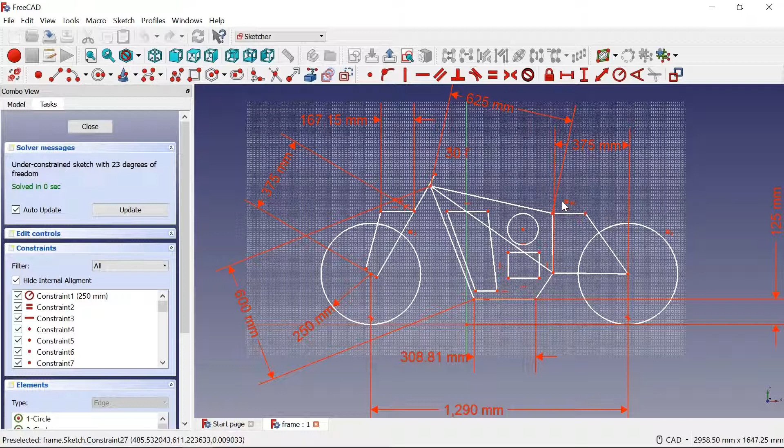I did think now that perhaps I'll make it a hardtail and put a seat on it, a sprung seat, and then I started thinking about springs. Oh dear, then I got distracted again making springs. What a job.

Here we go, spring making. We go into this thing, which is a funny thing. This generates a helix, which is fine.

We'll go for the height first, 60 millimeters, and we'll go for a radius of half that, maybe just under. And then pitch, we want it to go into 60, so we'll have 5 turns, so that's 12.

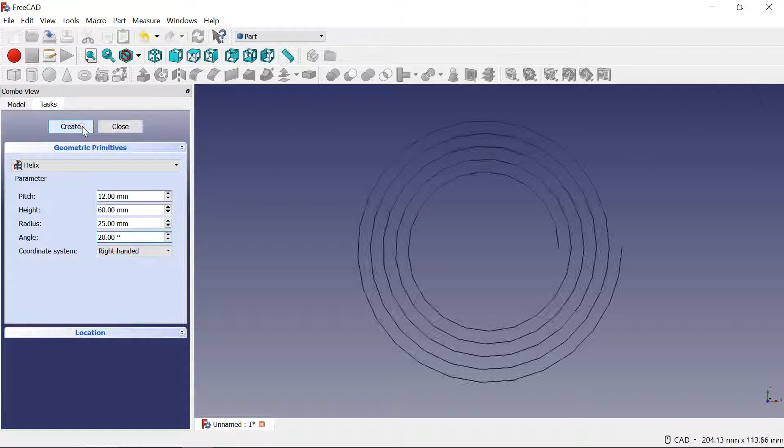And then I want it tapered because seat springs used to be tapered. I don't know whether 20 degrees will look right or not. Right-handed, left-handed makes no difference. And there it is, created.

Yeah, that doesn't look too bad. It's only half of one, but never mind, we'll get there.

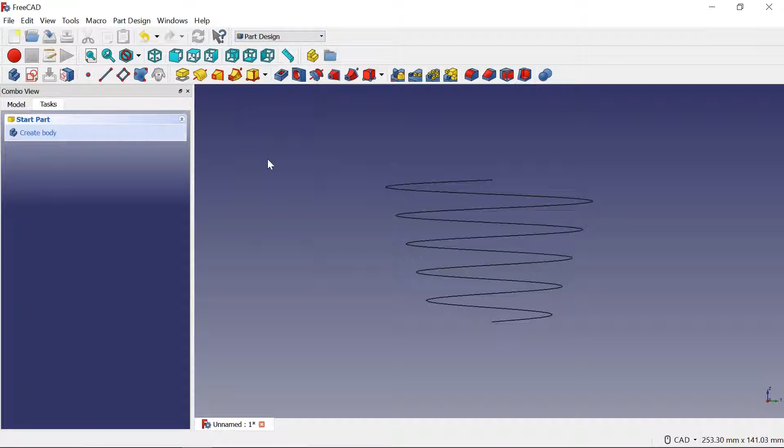And go back in now into part design and create a sketch. That's the wrong plane, we want XZ. I think we do. I'm looking, yeah. Now that's right.

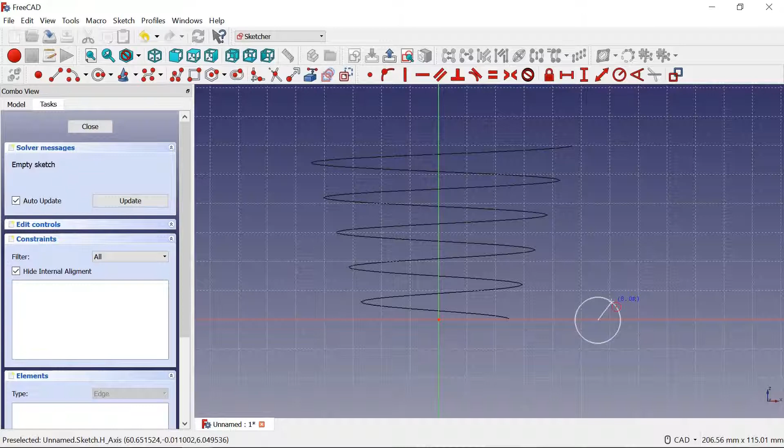And we have to pop a circle on there, and we'll locate it on the x-axis, concentric with it. Doesn't matter what size it is at the minute.

And then we have to remember what diameter we took. This is always the fiddly bit. I'll have to, you have to click there, and click there, somewhere there. Oh, blooming thing. There we are.

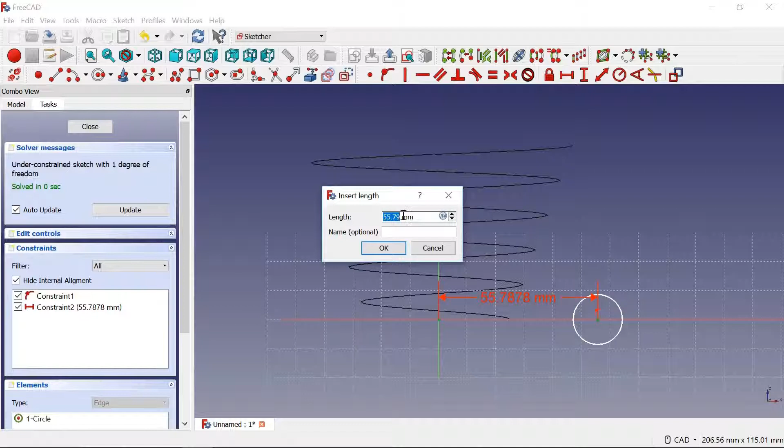And then we take a horizontal distance, which should be equal to the radius, 25 millimeters. And that looks as if it's dropped it in the right place. We'll now set the radius to 2.5 millimeters, giving me a 5 mil diameter spring.

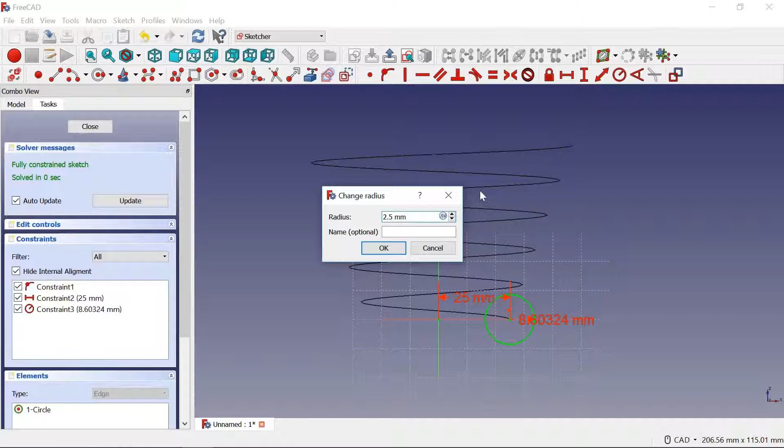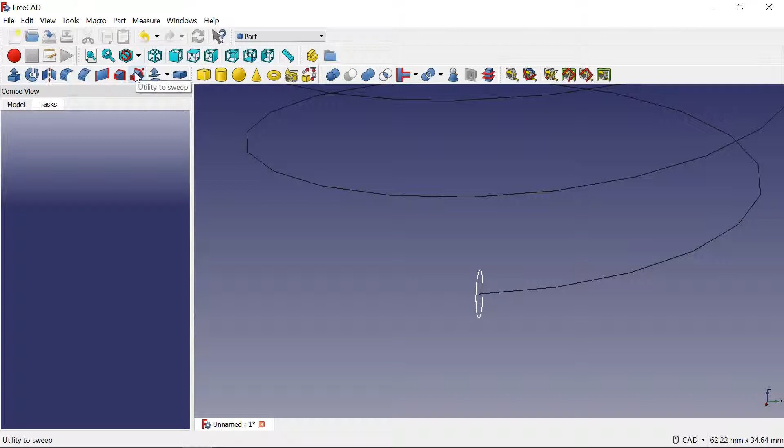I think that's in the middle. Go back to the part workbench. Yeah, that looks near enough the middle. And we go to this sweep utility.

We want to sweep this sketch profile, which is a little circle, around this helix. Yeah, that's alright. Looks all dippity-doo. And we say sweep path and select all the segments of the helix by holding Control and left clicking. We've done that. That looks good.

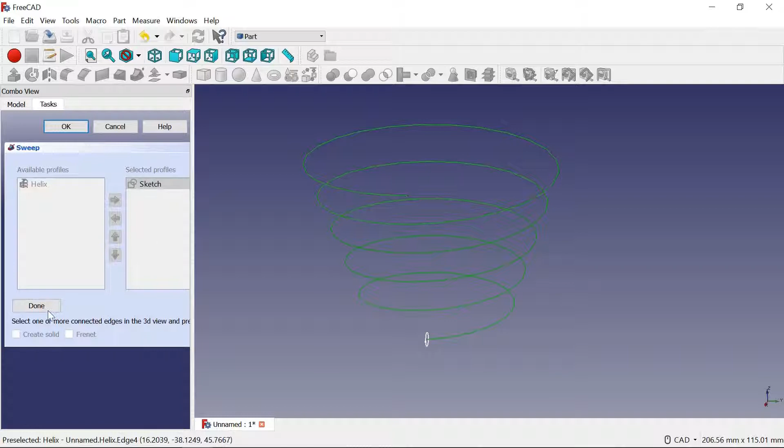We want to create a solid and a Frenet. The reason we create a Frenet is because the ends will end up on the same plane then. If not, they can end up all funny. I don't know why, half this is way beyond me.

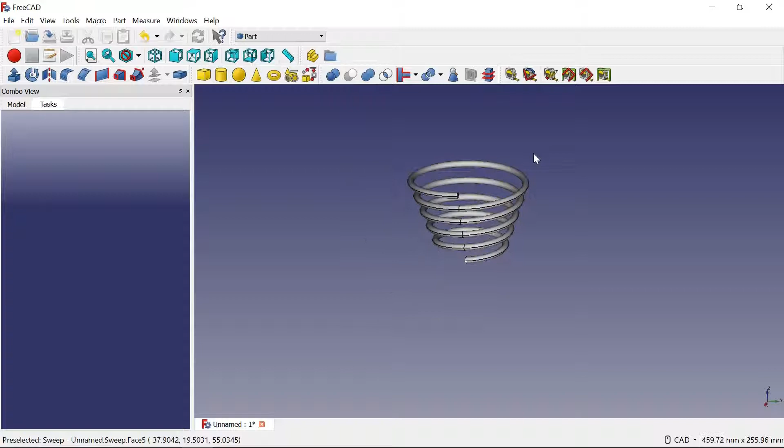Now we've got half one of the seat springs. Seat springs seem to be small at the bottom and small at the top and thick in the middle.

So what I decided to do was mirror it, and we don't need to bother with anything here. It'll do.

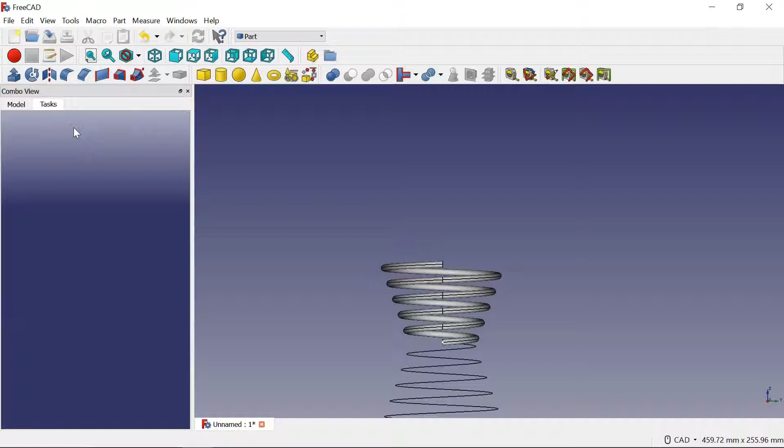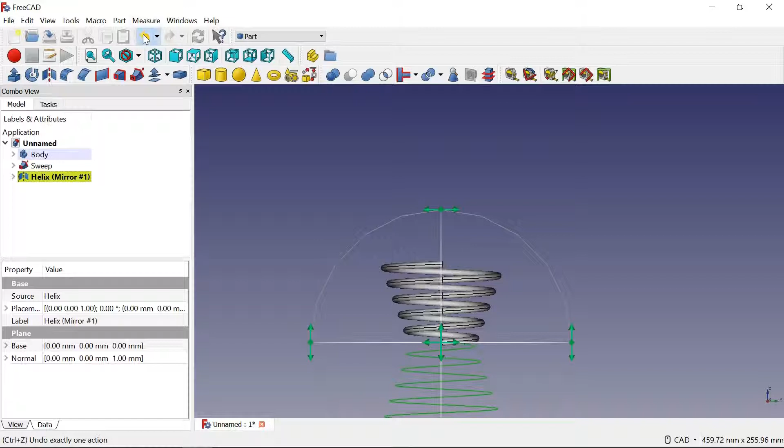And it's mirrored, but unfortunately I picked the helix and not the sweep. So after a bit of pondering, I didn't want to do that. No, we'll get rid of all that. I'll just delete it. And then we'll pick the sweep.

No, we don't want that. That's what we want, the sweep. And then we'll mirror it. Again, everything's pretty well okay there.

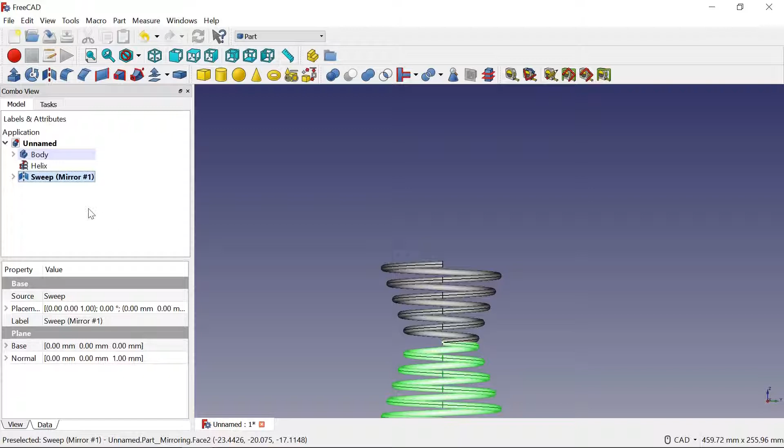Now we've got a mirror. There it is, jolly good. I'll transform this, it's not super critical on dimensions.

There it goes. Now the problem is, it's a mirror image, so it's the opposite hand. I couldn't work out what to do for ages. Then I suddenly thought if I mirror it again, then it'll be correct-handed. Brilliant.

Don't know whether it's the proper way of doing things or even the quickest, but it's the way it works.

Can't always see things because there we go. There it comes. Now if I rotate that through 180 degrees on the x-axis, that'll be the red dot. And give it a twiddle around. There we go.

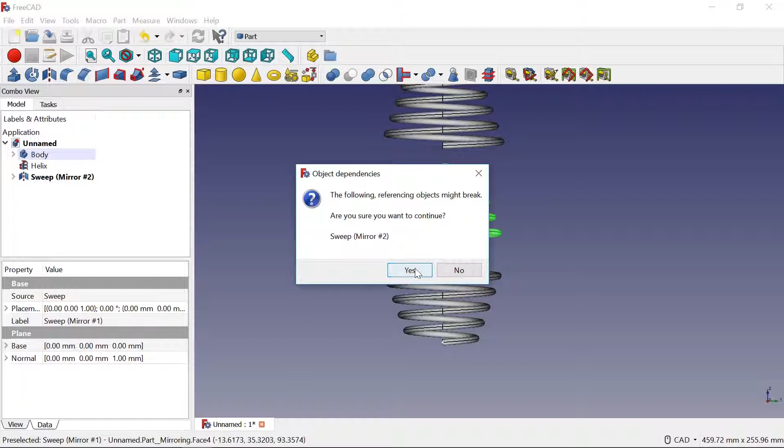And we should be something like, you can, I think we'll delete this one before we go any further. It always says this, doesn't seem to make any difference to anything.

Right, and then we'll transform that. Now that should be close enough, but I suspect it isn't because we're going to do a Boolean operation. So I'll adjust this increment down to 1 and just nudge it round a bit on the z-axis, which will be the blue circle when I've found it.

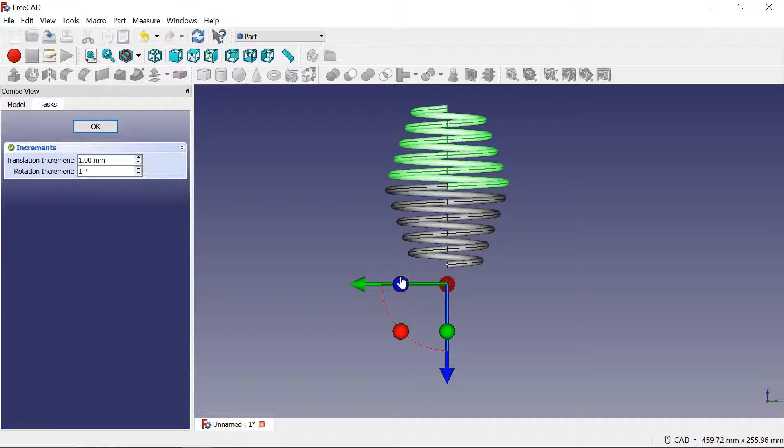Oh, there it is. No, we don't want the x-axis, that's that baby. And these are a bit arduous sometimes, just have to twiddle things a bit and it'll work. It's gone the wrong way. That's perfect. We'll look to have an overlap there. It's only a little bit.

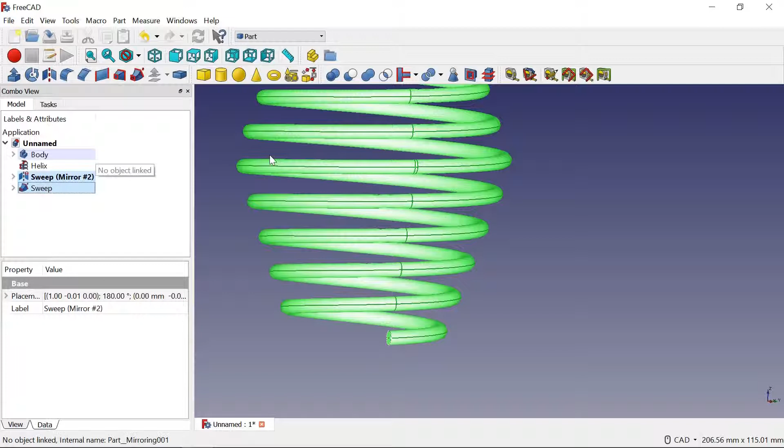And click OK. And now we should be able to fuse them together using Mr. Boole's famous algorithm. I want both of them selected. And then we go to fuse together. And then we have a fusion, as you can see on the left in the tree. And there they are, all stuck together. Wonderful.

And now that's something like a spring. It's still not right in that springs should have a parallel face top and bottom to seat on. Took a little while to work this one out, but it's quite easy really.

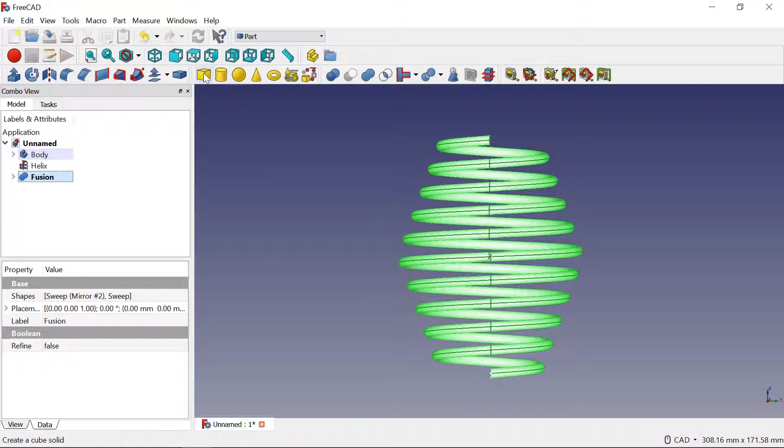We just get a cube and it'll appear in the origin down at the bottom there. There it is. Select it, and then we go down here and we want it to be certainly wider, a lot wider than we want, and a lot longer. Height doesn't really matter, we don't need much height for this job.

Then we have to pop it across and down a bit. So we go into placement, and those where the three little dots are, if you click there, you get this sort of box for instructing it. Hey, it's a nightmare, this. Now it must be minus, I think.

Yes, minus. We'll go 40 because we made it 80. Again, minus 40 because we made it 80. There we go. We've got it in the middle. Now we've just got to shuffle it down.

And this is where I have to think about the job. It's 10 millimeters wide, so we'll try minus 8. Because we're going down the way. We wanted to go up, it'd be plus 8. That looks about right. There's just a little bit of spring poking out, which is what we want.

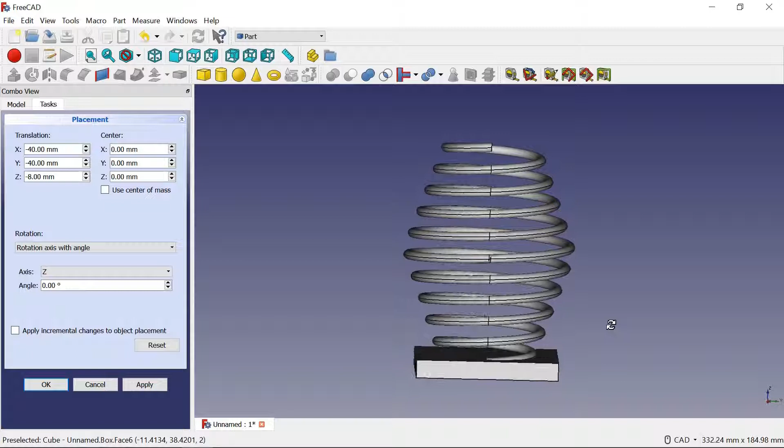Yeah, I think we're there with that bit. Apply it, say OK, and then we want the fusion first, because we want that to, and the cube to subtract from it. Then another Boolean operation, and you'll see we've got a nice flat bottom on the spring.

We've still got the sketch and the helix there, but they're just construction stuff. They wouldn't render anyway, but I'll get rid of them before we've done, or at least hide them. Now I want another cube, so I want to do the same at the top.

Again, it's just a repetition of before, because that worked fine. Well, nearly. The height is going to be the problem. The height of that doesn't matter, obviously, it's the positioning of it.

So we'll click in this little box. Again, we'll centre it by minus 40. That's 140. That's better.

And this time we'll be going up the way on the z-axis, so it'll be plus something. And as we were 120 tall while we were 60 times twice, I'm going for 118, I think. And that'll be a plus number. I'm still just trying to, yeah, 118, let's go for that. We can always shift it if it's wrong.

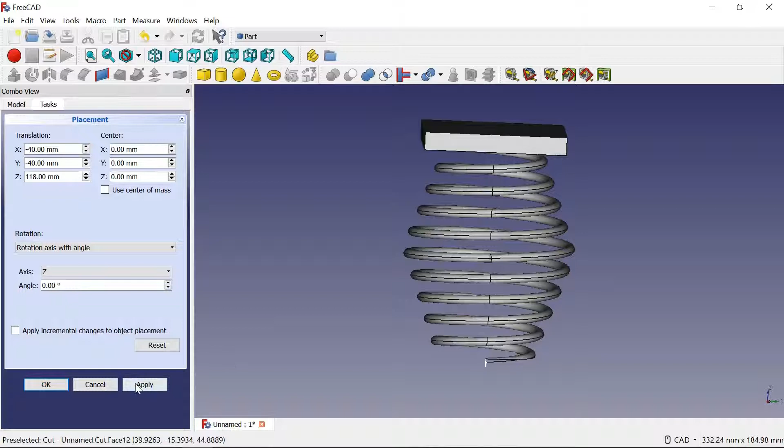Frightened me. I've got too many ones. There it goes. We'll just have a quick look. Yeah, and it's poking out a bit. Same as the bottom. That's grand.

It does my head in, this 3D, thinking in 3 dimensions all the time and adding up and taking away as well.

We go through the same routine. We select the helix, which is now called a cut, and then the cube 2. And then now we get rid of the helix, and then we get rid of the sketch. Now it's gone.

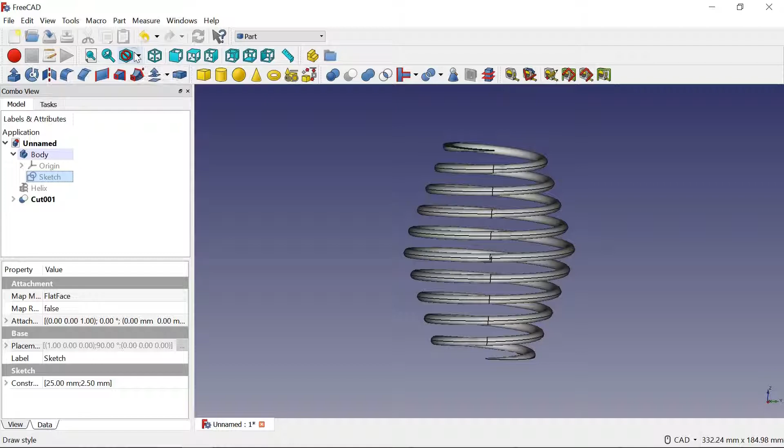We've not got rid of them, we've just hidden them. You can fetch them back if you wanted to adjust anything. We'll shade it, get rid of all the little lines, and as usual, colour in. And that's the job done.

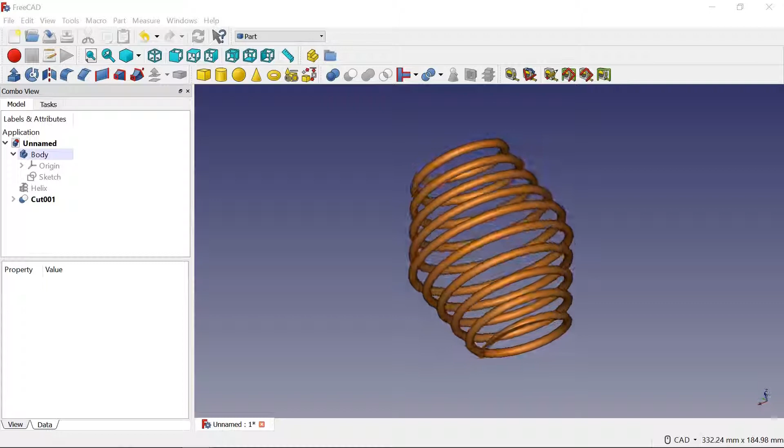As I say, we could really do with having a variable rate helix, because I want the top and bottom turns should be pushed together. But short of, I don't know, I think just wait till I got this far and hit it with a hammer.